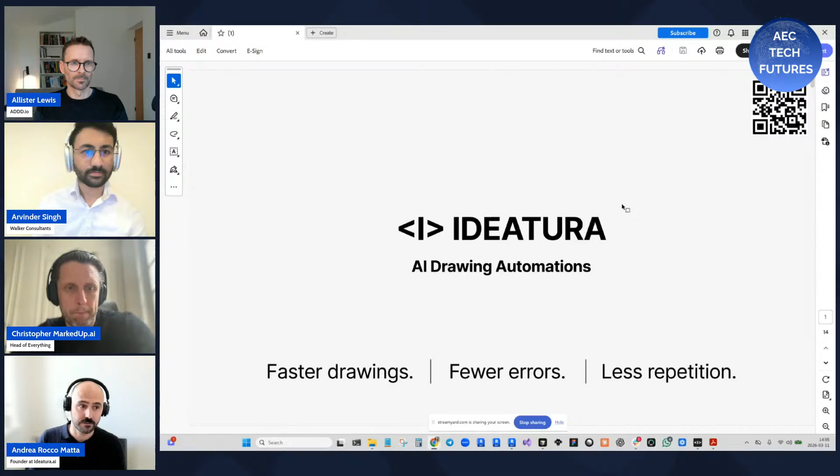We're bringing AI into your Revit workflows, and our main value proposition is faster drawings, fewer errors, and less repetition. The drawing bottleneck is a real problem.

Everyone knows it. It's a shame when the time and focus of an architect is spent on this low-value repetitive work. We've been talking to hundreds of architectural practices, and this very manual process we know is very costly.

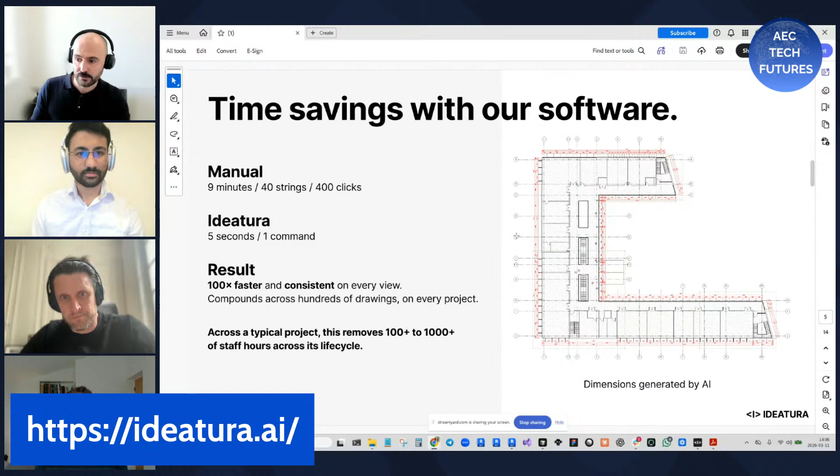With our tool, we can create dimensions, and I'll show you in a second, in 5 seconds and a single command, instead of maybe spending 10 or 15 minutes doing hundreds if not thousands of individual clicks throughout the model. This brings an acceleration in delivery and a level of consistency that wasn't possible before.

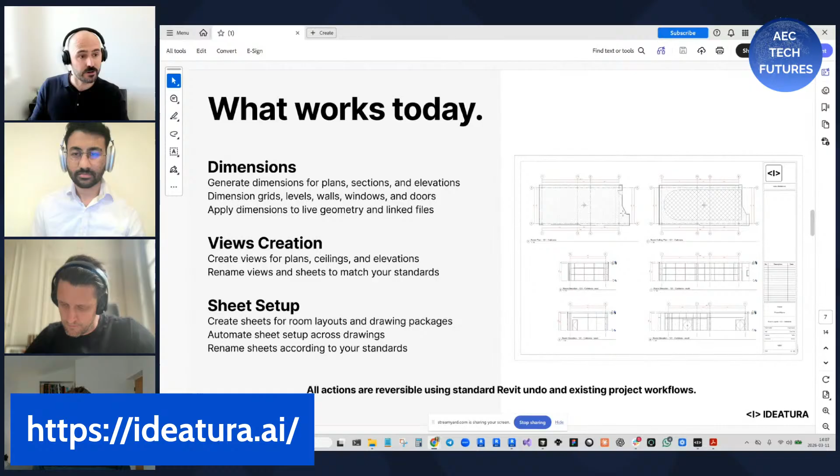I'll probably skip the how-it-works slide because I'll show you the tool directly, but this is the fundamental outcome you can get from our tool: we can create views, create sheets, batch rename, create dimensions, and place tags, as well as some new cool features I'll show you. That's the quick PDF presentation.

I think I'm going to jump straight into the product at this point. You guys can stop me at any time. I guess I'll take some questions later, but this chat interface, you can access it directly inside of Revit.

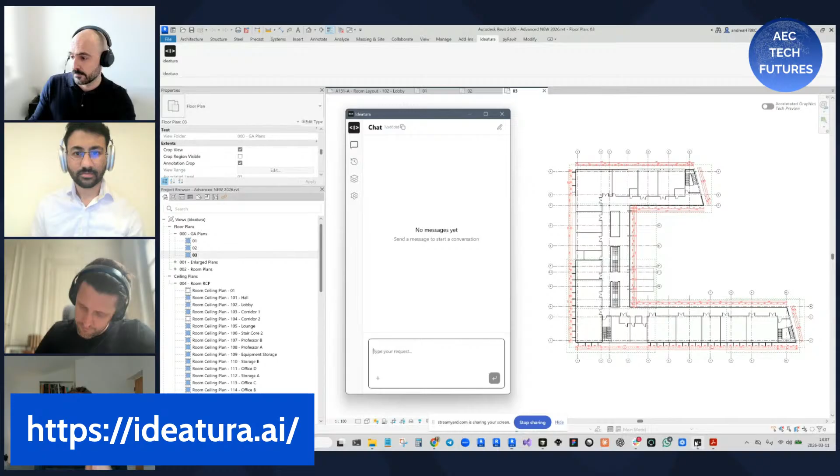Of course, you simply press the Ideatura button, and you can ask something like, what can you do for me? Some people really struggle with a blank canvas. They don't know what to ask, so just ask the tool what it can do for you.

The chat interface will take you through some examples. I can help you setting up dimensions, views and sheets, do some inspection of the model, some general automations for batch renaming, for example, etc.

You can create a new chat and ask it to generate some prompts to test dimensioning tools. The AI will generate examples that you can send back to the tool itself to start experimenting with some of these automations.

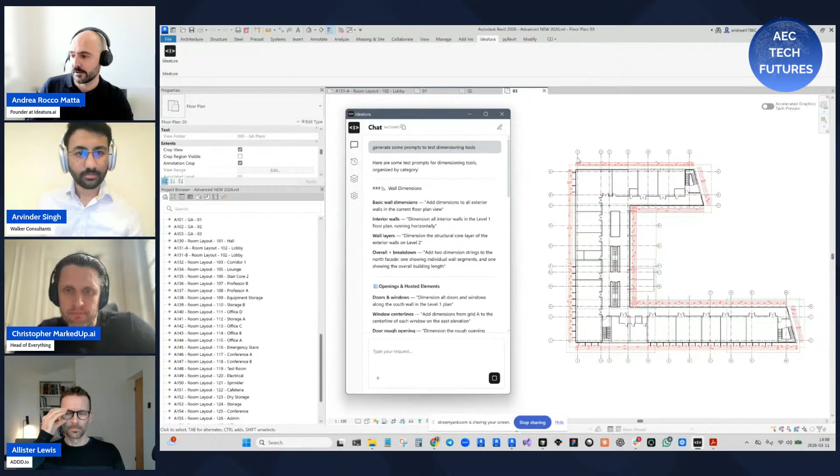The basic example I'll take you through is the classic Revit sample file. Everyone has seen it, the usual 3-story building. We pushed it a little further by creating a bunch of angled walls and linked files.

Let me see if I can select it. There you go, linked files, and a bunch of drawings, all nicely renamed with a consistent layout. I'm going to show you a quick drawing.

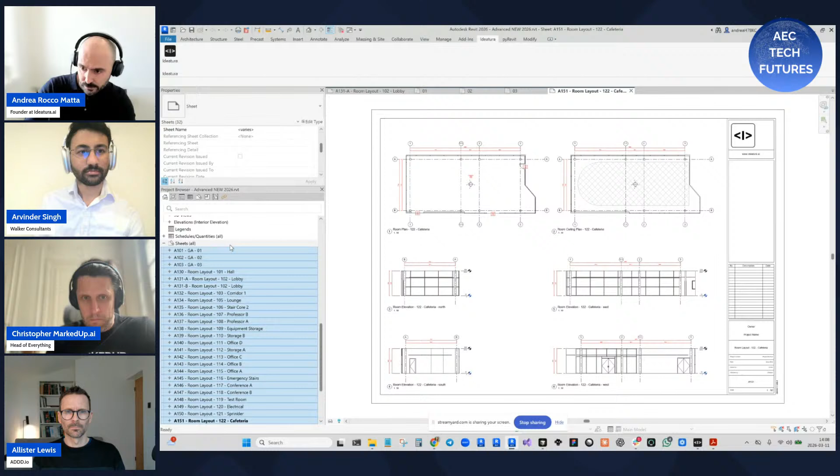This is fundamentally the output of the software at the moment. I'm just going to pretend I'm one of those architects that has no idea how to use Revit. I'm going to start destroying all my content.

All my sheets are gone. My beautifully renamed RCP with cropped views are gone. My floor plans are gone. It's all gone—enlarged plans and a bunch of room elevations, maybe 100+ elevations in here.

All destroyed. Ideally, within a couple of minutes, I'll be able to recreate it all, and by the way, all my dimensions too—select dimensions across the entire project.

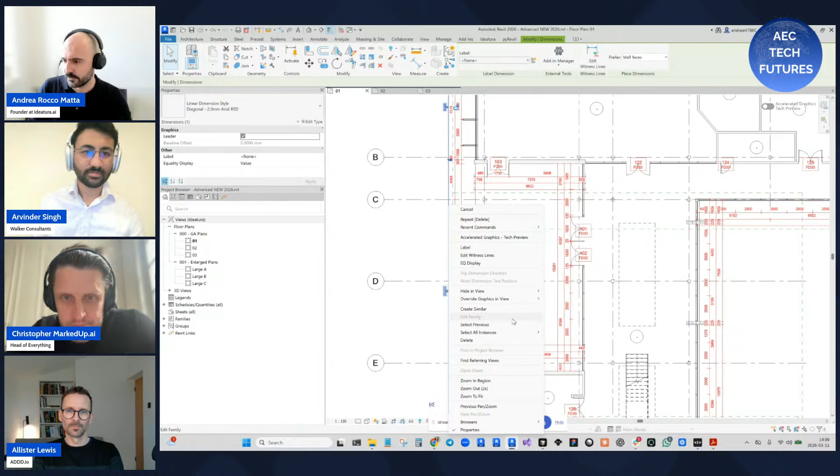100 dimensions in this case, not that many. I'm just going to remove them all. So we're back to the basics, and a bunch of tags—tags can go as well.

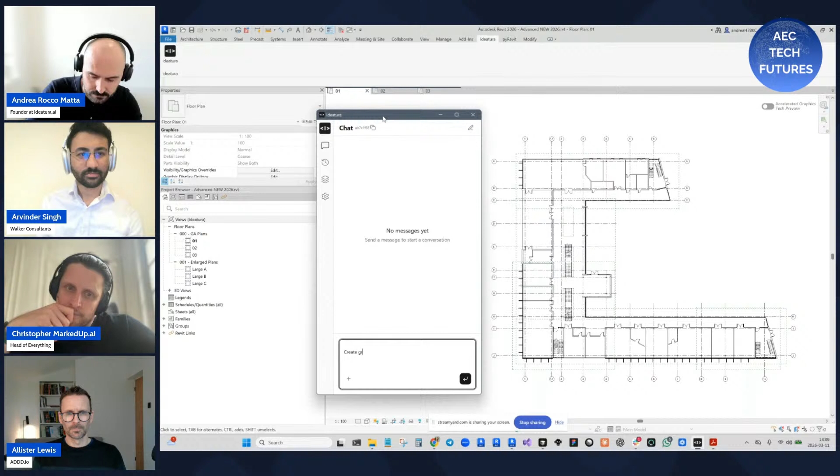Right. At this point, you can simply ask the tool to create some automations for you—basic grid dimensions. Create grid dims. I'll keep it super short and to the point.

The tool will take roughly 30 to 50 seconds to create an automation for you. In the background, the AI is understanding your request, slowly planning how it's going to build that automation, and then it's going to return you a button. We fundamentally built this knowing people can obviously look for different solutions—there are a bunch of plugins in the industry.

You can go to Autodesk Marketplace, or you can buy some tools from other providers, or you can simply go to Ideatura, and we are a plugin that builds you plugins.

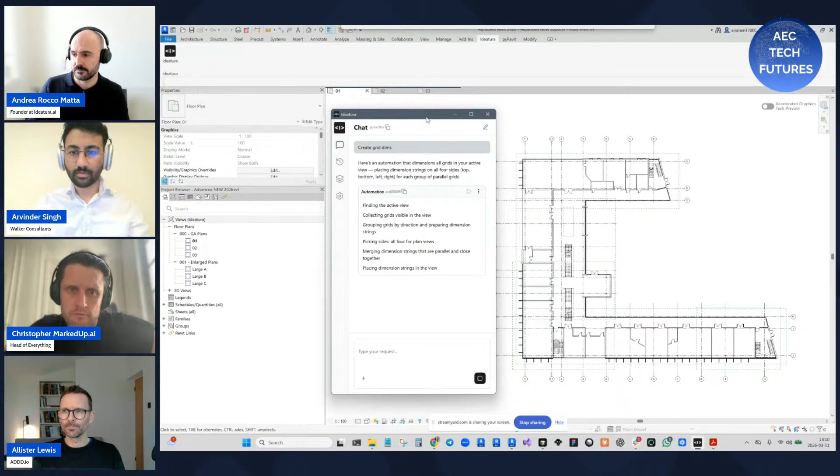Instead of going looking for different solutions, you can simply ask the chat to create an automation for you. Let's give it roughly a minute. For context, the chat shows you basically what are the fundamental steps that it's taking.

The chat has memory, meaning if you're not happy with the initial results, you can keep on iterating. You can send another message. In this case, we've created some basic grid dimensions around our plan. If you're not happy, you can keep on modifying this prompt.

You can say create 2 strings of dimensions, 1 overall, 1 capturing every intersecting grid. Use offset, 1 meter and 2 meters. It will basically remember your previous message, remember the automation it was able to create, understand your new context, and update this new automation to achieve what you're asking to do.

It's now drafting the new automation. I'm just going to cut it short for the purpose of this exercise. Once you're happy with the automation, you can simply save that automation into your own library of tools.

In this case, I'm going to save it to Ideatura. I can access my own libraries. You usually have your own account and a company account. You can distribute all these automations across folders that you can structure, organize, rename yourself, where you can create automations just for dimensions or just for views and sheets, etc.

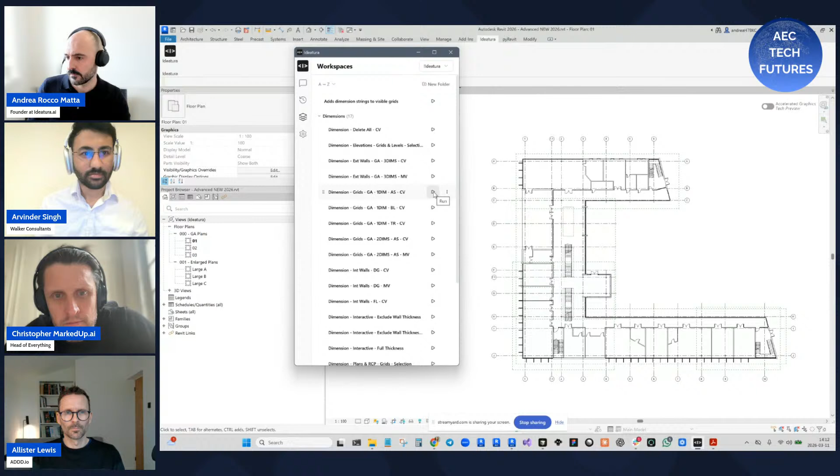You can create automations that make sense, first of all, exactly to your practice standards. You can place dimension grids on the bottom left, or you can ask to place 2 dimension strings across all sides of this particular view.

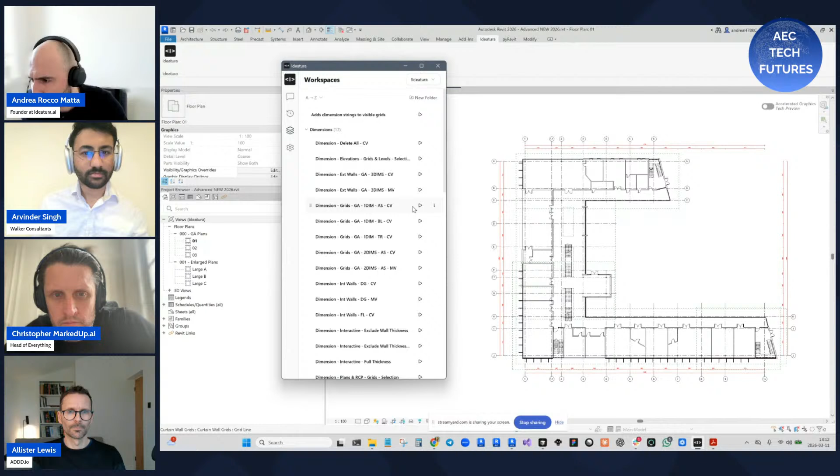There you go. Maybe you have automations to create dimensions for your internal walls. I'm going to run a basic one, current view. Or maybe you have an automation to create dimensions for your external walls.

Maybe you have an automation to create views, to rename sheets, to batch process that information, following your particular standards. In this case, we created dimensions for internal walls, etc., etc., etc.

The main point here is that I myself am a fairly traditional Revit user. I've been a Revit user for the past 10 years, but I cannot myself create a powerful Dynamo script. I definitely cannot code in C# or Python. I can do a little bit of vibe coding, that's what I'm doing these days.

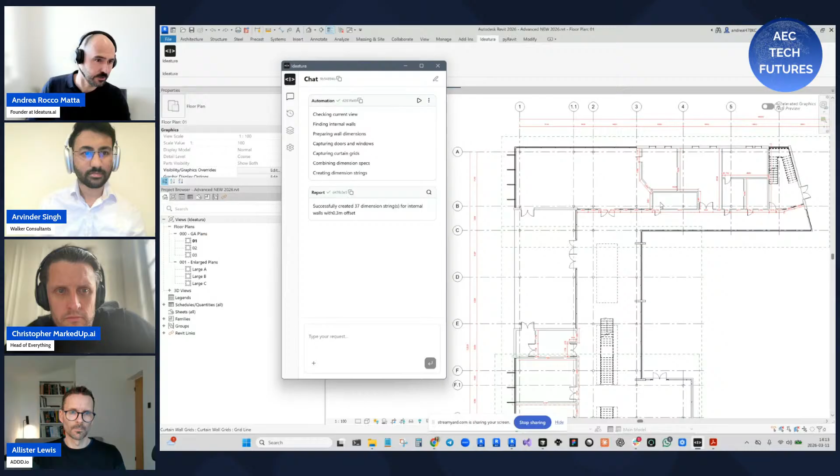But with this new tool, I'm able to create hundreds of possible automations around the context of helping you with dimensions, views, sheets, etc., many other features that we're now building, which basically democratizes access to the ability to create these automations and brings a level of standardization across the practice that was basically unexperienced before.

This is the idea of the product. I can run a quick automation where I'm recreating all the views, for example. Let me see if I can find views. I create a single room plan for the current view.

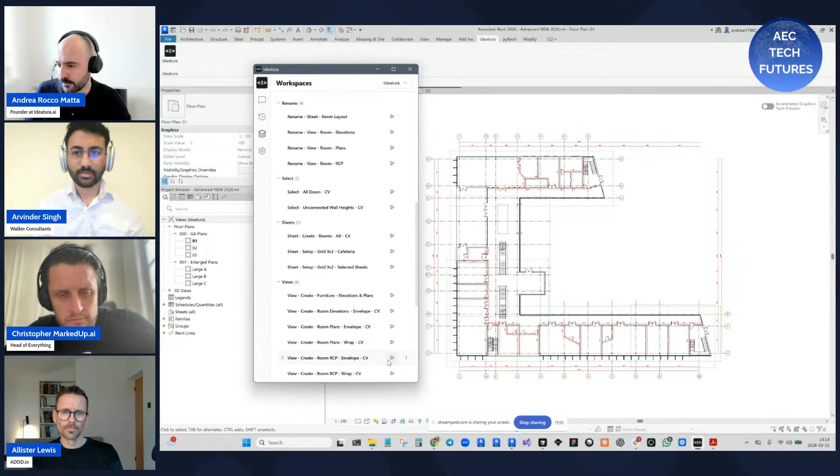This one is looking at every room in the current level, grabbing all those rooms and creating enlarged room plans for every one of those spaces.

You can automatically suggest a new naming convention for all those views. You can automatically apply view templates. And you can do the same things for ceilings, elevations, sheet creations, and then automatically, there you go.

We have created a bunch of rooms. Just checking. Yeah, the right view template has been applied, the right naming convention, which in my case is room plan, room number, room name.

And we can do the same thing for our RCPs.

How are we doing with time? Should I cut it short or? No, all good, keep going. It's all right, we've got time.

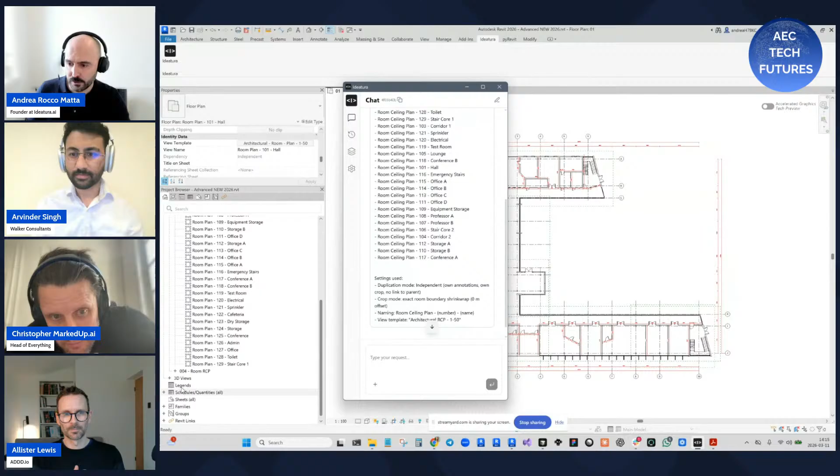Of course, here we go. We've just created another roughly 30 RCP plans. By the way, I'm just going to show you a few of those.

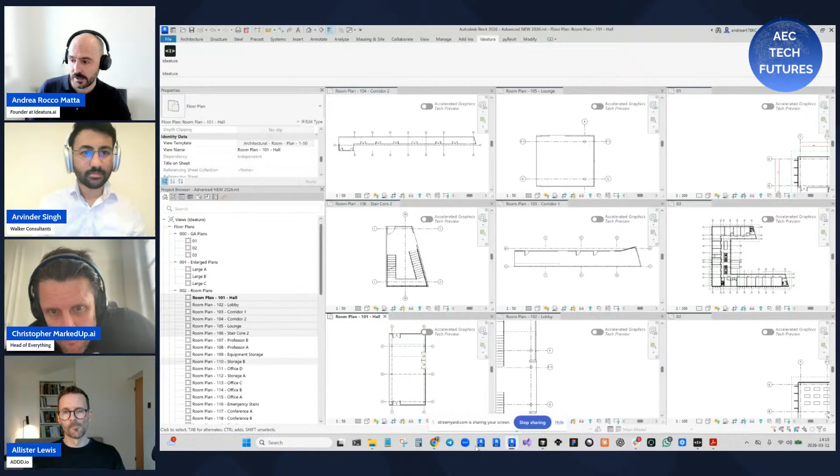All nicely wrapped around the actual room boundaries, which is something that could be very time consuming to do manually. Yeah, and I'm just going to go back to level 1, close a bunch of views just in case.

Now I'm going to do the same thing for all my elevations and my sheets. This one is creating 4 elevations for every single room, so 100 plus views in one shot, once again nicely renamed with the correct view template. Done.

And once we do that, we can also obviously create a bunch of sheets. Same logic: create a sheet, A0 format, for every single room in the space. Done, all batch processed in one shot.

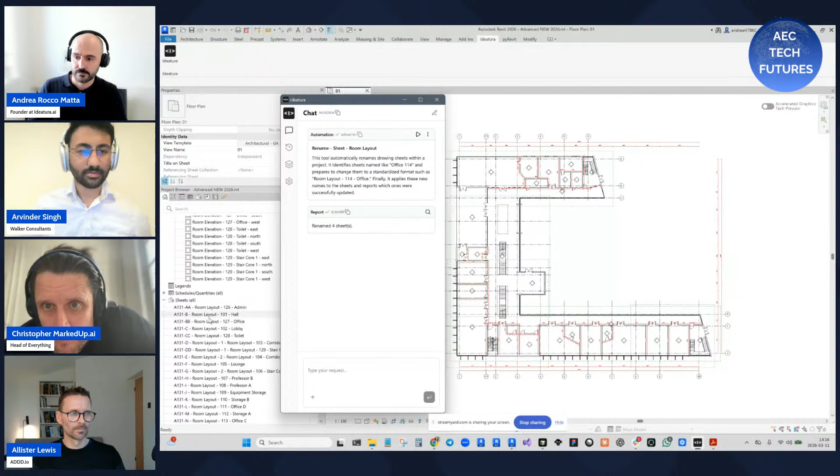I wonder if I need to rename those though. I have a separate automation in this case to automatically rename all those sheets to my particular naming convention.

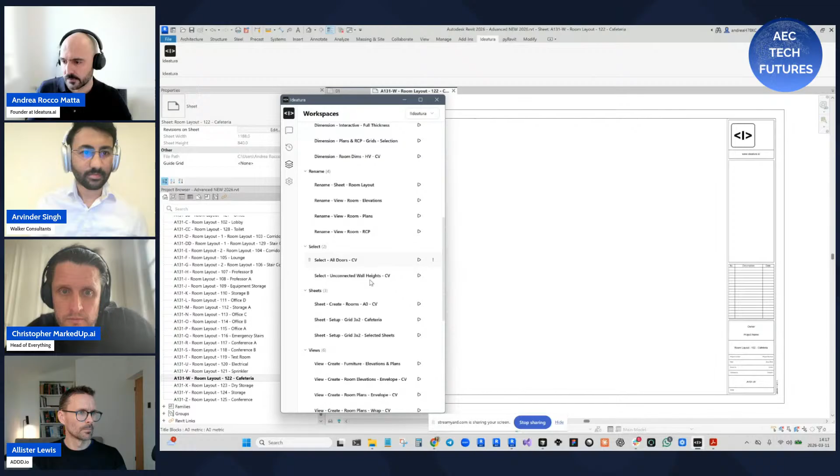And then the last step is fundamentally to try to place those sheets. I'm going to grab, let me see if anyone can spot cafeteria. There you go, empty sheet. I can go here and suggest... let's see if it's going to run, because I was rebuilding this automation literally an hour ago.

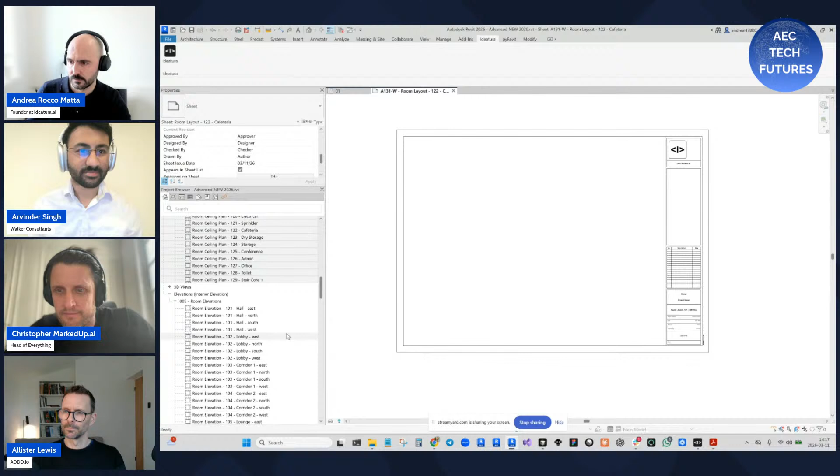Oh, should have cropped that view. Going back one step. Grab my floor plans, be sure they are cropped, ceiling plans, crop notation visible. Once again, going back to my cafeteria sheet.

Run the same automation, automatically placing those views into sheets. And with the same logic, you can ask, hey, please help me dimension all my grids, all my levels, help me add some door tags, etc. This is roughly where we are taking the product at the moment.

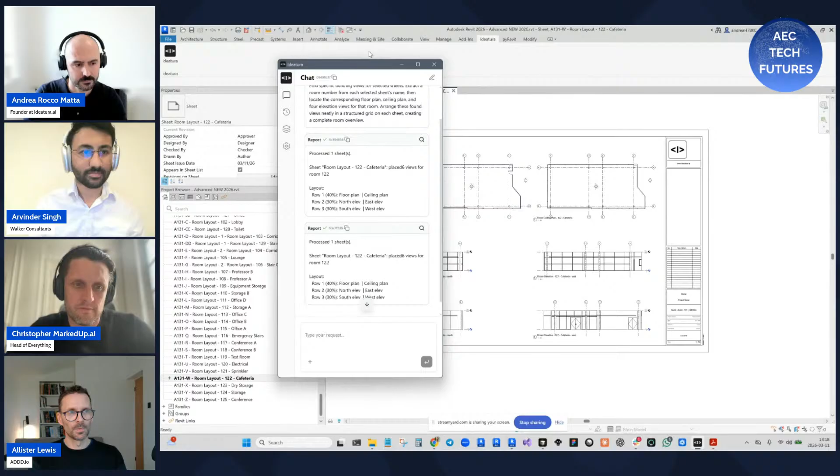Yeah, that looks incredible. What I find quite interesting is the consistency you could apply across all of your projects, because you could say this is how we dimension, this is how we annotate, this is how our project should look, and use this to coordinate across different teams, because one of the things practices find is all the information looks different because different teams work in different ways. Correct. Yeah, brilliant, thank you.

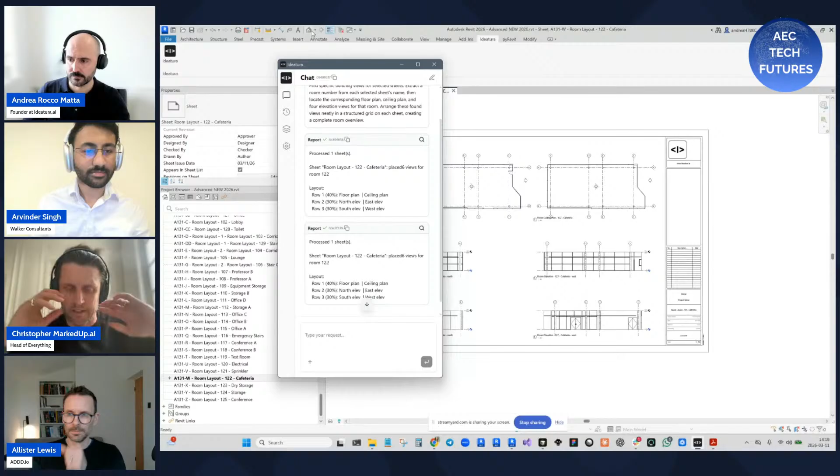Okay Christopher, would you like to continue the workflow and show us how Markedup can then do a QC process on that? Absolutely. I think the idea here is that Andrea has done all this work to prepare this design, and we're about to send it over to the client or the GC because they're going to go bid this thing. What we're trying to make sure is that it's good, we haven't missed anything, so that we look really professional and we've done an excellent job. Right? That's the whole thing.

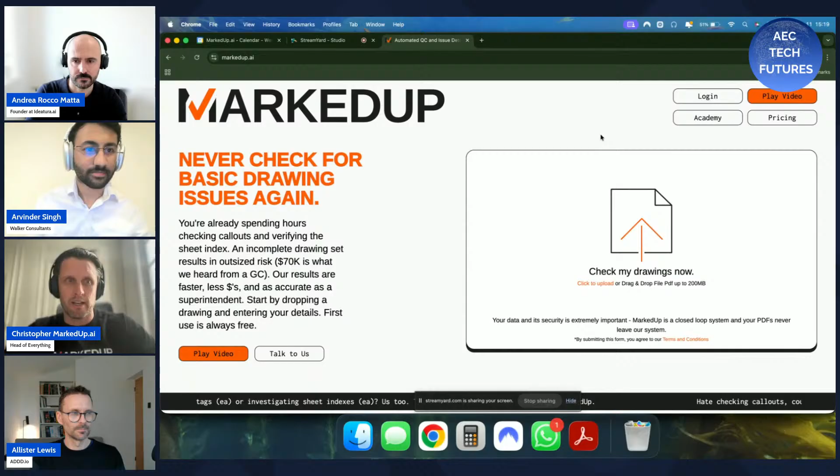Hopefully this doesn't give you... let me know if you can or cannot see my screen. Yeah, all there, perfect. So this is Markedup, just go to the website, markedup.ai. It can't be any more simple than that. We're actually going to log in here, create a free account if you want. I already have one, naturally.

And so again, I talked about this before, but we're looking for basic types of drawing errors. I'm on a laptop, so I'm just going to zoom out a couple clicks, but we're just searching for the most basic of drawing issues. The idea here is that a human should know when or how you can build it and how to design it, how to make it beautiful, how to make it functional.

But then spending that time, just like what Andrea is doing in Ideatura, which is so cool, that can all just be standardized and done with a click. It's a similar kind of thing. Nobody's counting door tags, nobody's checking that call-out symbols are correct. And so this is really the entire workflow that we've built.

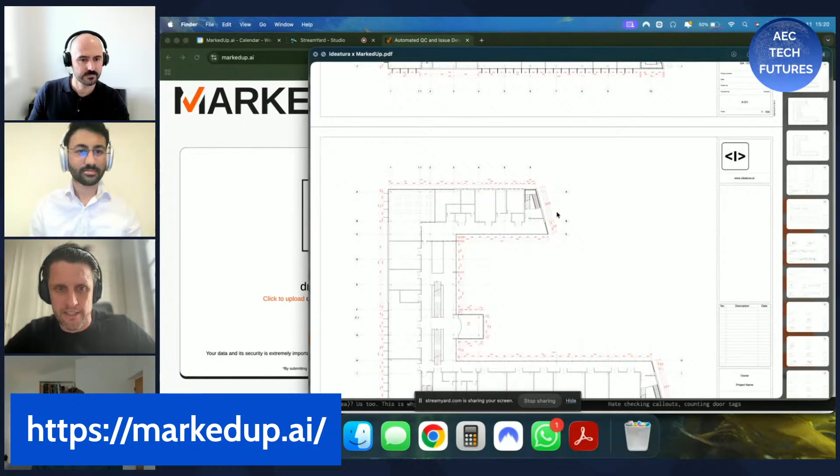So here we are, Markedup.ai. I'm going to do this like a cooking show, where I'm going to take this drawing, which Andrea kindly provided to me. This is the drawing set that he was using all of his prompts in order to annotate, and we're actually going to check it.

And so I'm going to just take the PDF, drag it and drop it here. There we go. Oops. And I'm going to check now. It's going to go back and get me a page count, and it's going to take me through a couple of prompts. We tell you what we're going to check for.

I personally hate checking for callouts. I'm sure that project managers love it though. So I think that's a critical distinction. We're going to add a little bit of information here.

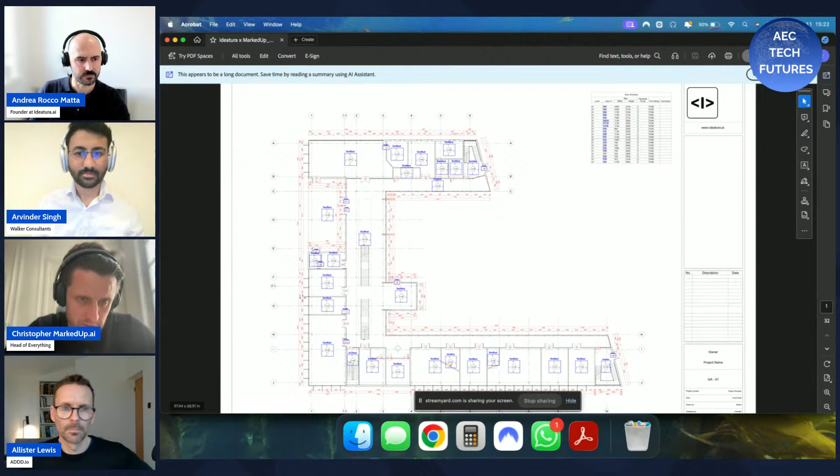Just like a human would do it, let's zoom in here. I know it doesn't really matter, but we can say on 117 that details 3, 5, 4, 6 do indeed exist. So if I just jump to that, you'll start to see that those elevations do indeed exist for that area.

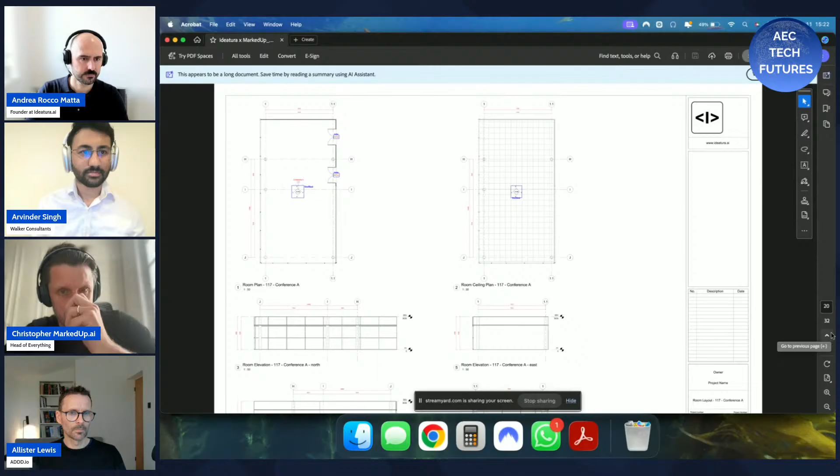Let's go see if we can find some other stuff. Again, we're just using these bounding boxes as a way to track and change. So I can see here I'm getting a couple errors. What's going on here? 112 is missing from the schedule, so let's go check that out.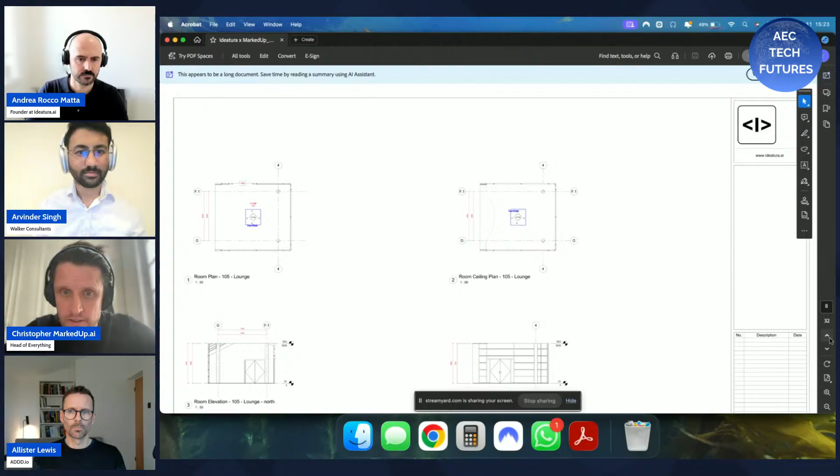What else we got here? 112, 111 - so we got some tags that are missing. 110 - we're going to go check these against the schedule. And what else we got here? All right, perfect.

So yeah, here we go - 107, 106B. Points for people that are writing these down. Let's jump back to sheet 1 and have a look. I'll at least remember these last two, 107, 106B. So we'll come over here - 107, no, 107, no, 106B. So indeed, in this case, these door tags are missing.

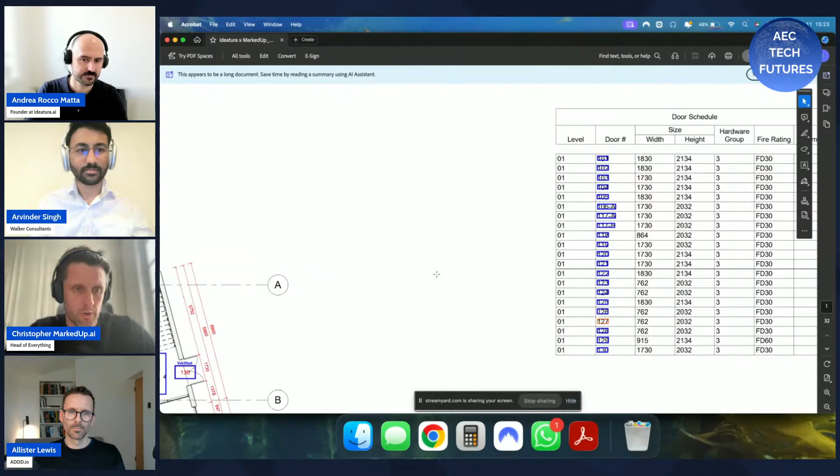I don't know about you guys, but if I had to go through and check all the callout symbols - maybe I'm fast at it, so it takes me 30 seconds each - it takes me a minute or so to find the door tags on the 32 pages of this drawing set. But this would have taken about 12 to 15 minutes for us to process.

And I can't remember the final count, but it was at least 100 callouts. If those took a minute each, that's an hour and a half of my day spent doing brain-numbing work versus doing other more important things - winning more jobs, tightening the design, working closer with the customer or client to build a better product. So all those things are, I think, more important than counting tags. This is exactly what we've solved for.

Allister, I'll hand it back to you, man. That's us.

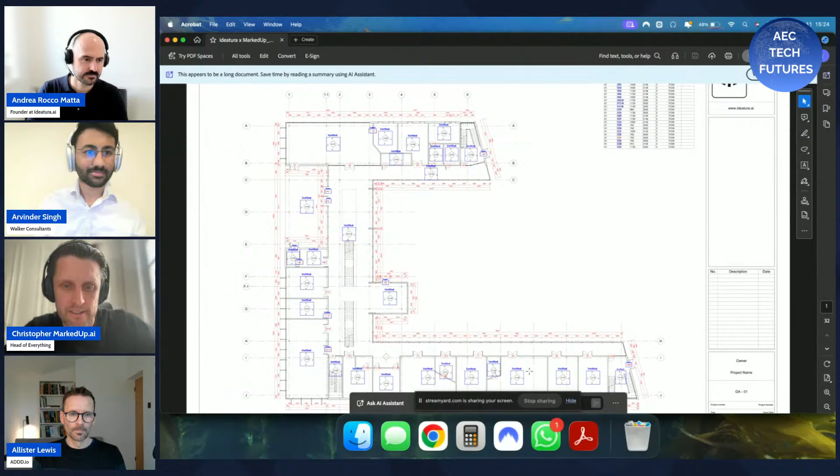Okay, that's really great, thank you for that. That's super short. It's really good because it's the sort of thing that saves us so much time on a workflow. I think that's really, really helpful.

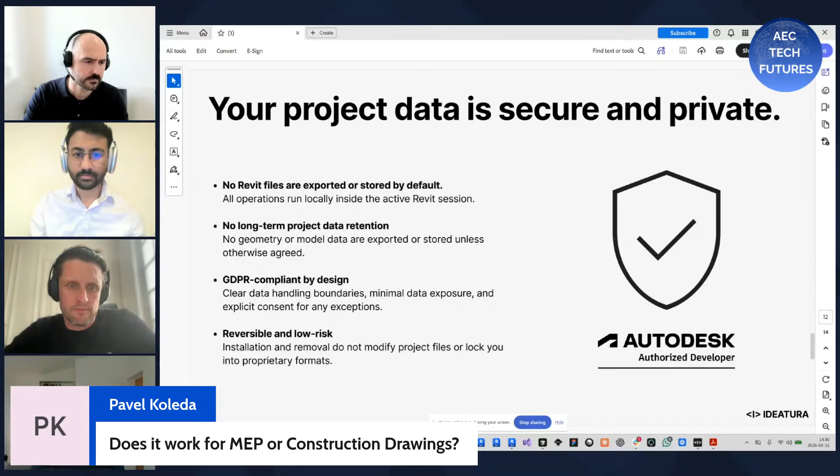Alright, next question: does it work for MEP or construction drawings? I assume that's for you, Andrea, but it'd be good to check on both, MarkedUp discuss that as well. Don't need to share my screen for this one.

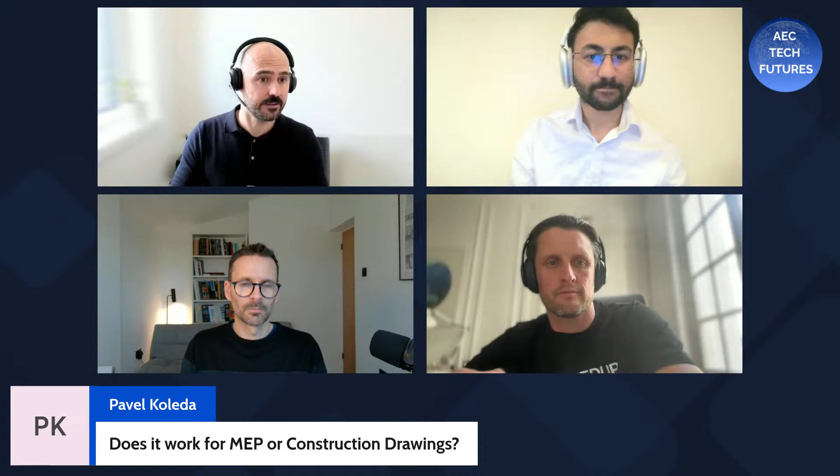Yes, it doesn't really make a difference for us, it's a bunch of Revit categories. So we have the ability to create views and sheets for specific elements that are not rooms. Rooms is just one of the most tedious and simple example where you need to create elevations, plans, and sections, but you could do the same thing around specific generic model categories, MEP categories, structural elements. You can simply ask to create views for those elements and sheets for those elements as well.

When it comes down to dimensioning, it's a slightly different discussion, but we can now dimension most elements within Revit anyway, not just walls, doors, and windows, or grids and levels. So Pavel, happy to talk to you as well, if you want to test some dimensioning for MEP, we can do that.

Okay, let me move on to the next one then. You can specify tools in MCP as well, same as an add-in, right? Does that make sense? I'm not sure if I fully understand your question, but yeah, of course, like what's happening in our tool.

I don't know if you've seen it in the automations we were running. There are a couple of things happening. One is code generation, where we're basically writing an automation on the fly for you. The other is that we have the ability to interrogate the model. That's maybe one I haven't shared yet. I'm going to do that once again, sorry to keep on flickering.

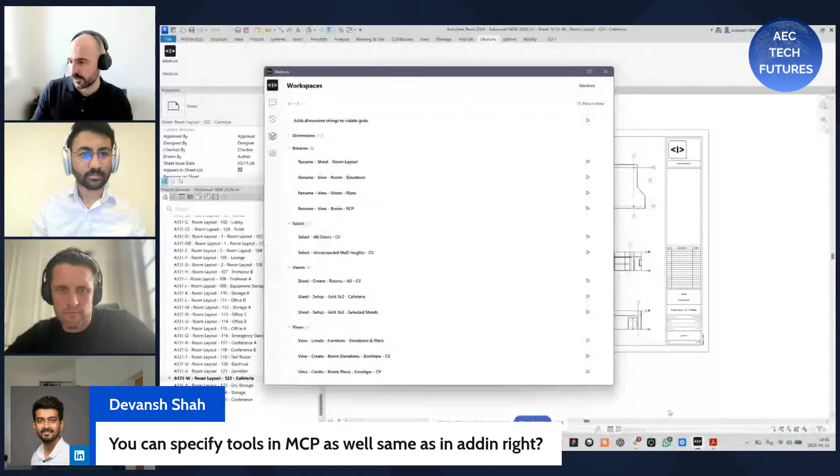Go for it, that's fine. I think I was testing last conversation. No, let me see if I can quickly find it. Revit automation, Revit model audit.

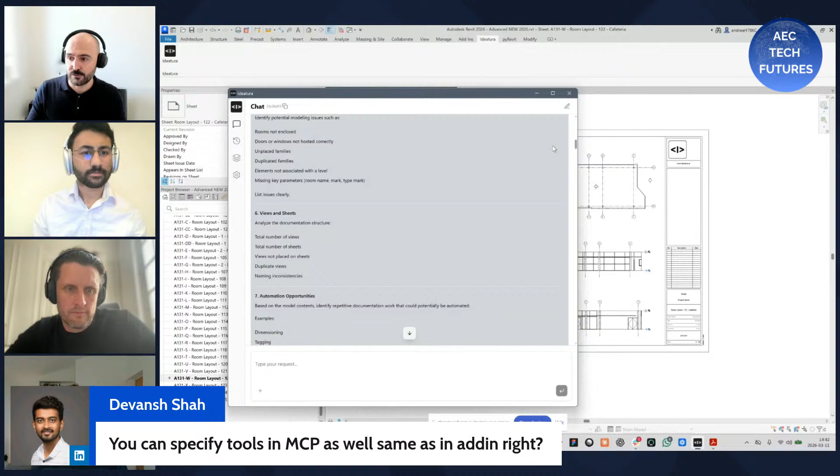Before I was running this kind of automation that is starting to cover QA and QC. In here, I gave a very large prompt saying, help me analyze the entire Revit model, trying to find views and sheets, automation opportunities, inconsistencies, etc. And these are the tools we were using. Some inspection tools, actually checking all the information inside of your model, looking at all the views, looking at all the sheets, looking at all the families.

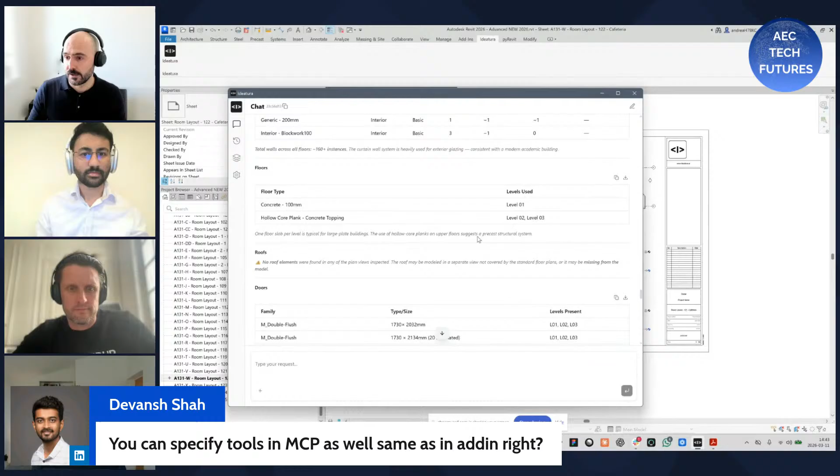As you can see, it was running for a while, actually analyzing the entire model. At some point, it's able to give you a structural report, a knowledge report, telling you how many levels, how many rooms, and the areas. It's still at the initial stage, because it's not actually capturing all the room dimensions here. But you can start seeing the possibilities of using the tool beyond simple drafting and actually doing some QA, QC with it. And to do that, you need to be able to interrogate the model with tools.

Hopefully that answers your question, Devansh. As always, he can reach out to you afterwards as well and ask another question if he wants to, to clear that up.

What if a company has its own templates and design standards? Will the drawings be created according to them? Yes. So as long as you can attach text explaining exactly what your naming convention is within the chat, you're good to go. Now we're trying to make it even easier.

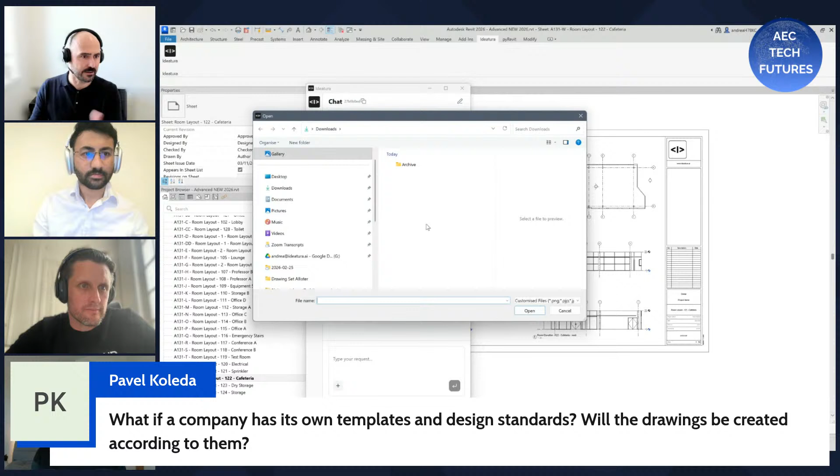You can simply click on the plus button, upload a PDF with your particular standards. The model will be able to interrogate the PDF with your naming conventions and your sheet structures, whether it's a PDF, a JPEG, a CSV file. You can upload that to the system. The LLM can revise that information, and it can use that as a knowledge base to help you rename all your views, all your sheets, all your families, etc.

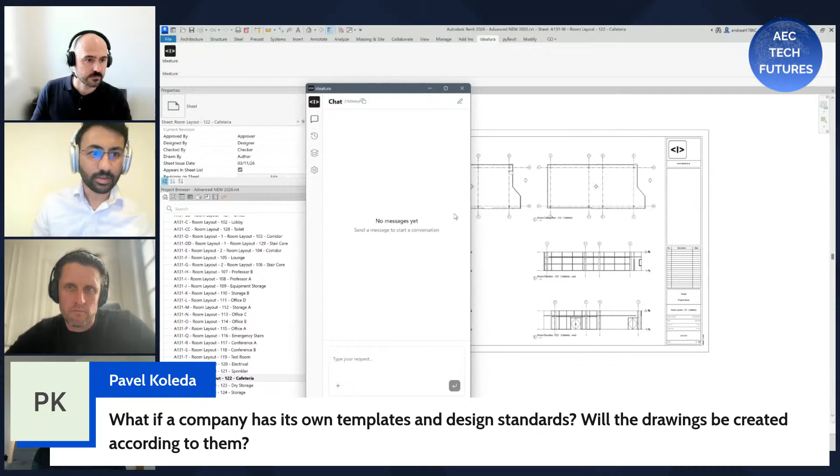That's awesome, Andrea. I think the same question applies to Christopher, whether your tool can handle company standards.

I think you said this before, or maybe it was Alistair, but one thing that has surprised me more, because it's my first construction project - I was building a ginormous hospital, so I just dealt with one architect for 4 years. I had very limited experience. Getting onto this side where we're looking at a little bit of everything, even within the same architecture practice, it looks like there can be totally different design standards across the board. I don't think that's a surprise - what we've had to engineer for is all of that variability and the endless number of edge cases.

An example could be, again picking on door tags, because I think it's a massive pain point within this industry. If you don't get it right, there are significant cost consequences down the road, which means the architect and the general contractor are on the hook. So that's a really big pain point to solve. But in the same firm, they had 3 different ways of marking out door tags. In one set of drawings, it was a rectangle; in another, it was just a number; and in another set, it was the room number plus some other identifier plus a door tag number in a box with a grid inside. So there's seemingly no design standard that I am aware of.